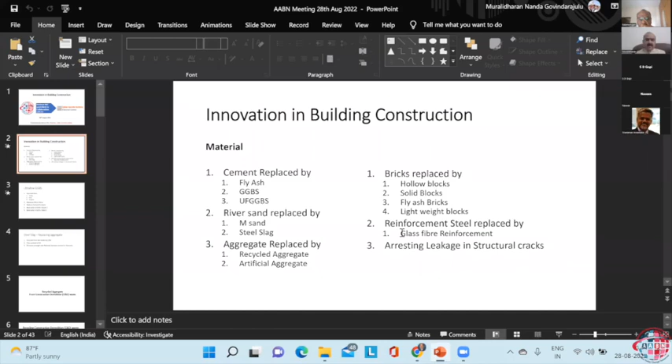So GGBS is ground granulated blast furnace slag. As per the codal provision, even more than 50% we can replace. It has all the chemical and physical properties of cement, and that can replace cement. We'll talk about that a little more in the coming slide.

Ultra fine GGBS is a further finer material of GGBS. GGBS is normally around 4,000 blaine, whereas ultra fine GGBS goes up to even 9,000, 10,000 blaine. That gets mixed with concrete for high grade concrete, where at times you're replacing with microsilica, you can use ultra fine GGBS instead.

River sand is getting replaced by M sand, and recently steel slag is also being used in the concrete industry, replacing fine aggregate. Interestingly, after the fine aggregate, coarse aggregate is also being replaced by recycled aggregate. I will talk a little more about that in the coming slide.

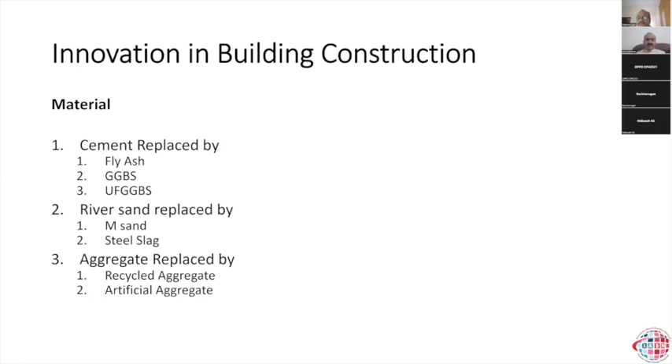About recycled aggregate, and the latest development, many people may or may not be aware of artificial aggregate. I am going to throw some light on that, which is very interesting and informative for the civil engineering industry. Of course, brick is replaced by hollow blocks and solid blocks, fly ash brick, and the latest is lightweight blocks. It has several properties through which the dead load of construction is minimized, cement consumption is minimized, and natural resources are saved.

You may think what is happening on the reinforcement steel side. The reinforcement steel is getting replaced by glass fiber reinforcement. Glass fiber reinforcement has got higher tensile strength than reinforcement steel, and it has a similar shape to reinforcement. You can even take rib steel less than 6 mm in this glass fiber. Other countries are already using it. Only the challenge with glass fiber reinforcement will be fire resistance.

There are many structures where fire resistance is not going to be a criteria, for example flooring, etc. So I'm also talking about some new products which can address structural cracks - cracks developed in the concrete. I'm going to share some products in detail which can be useful for engineers.

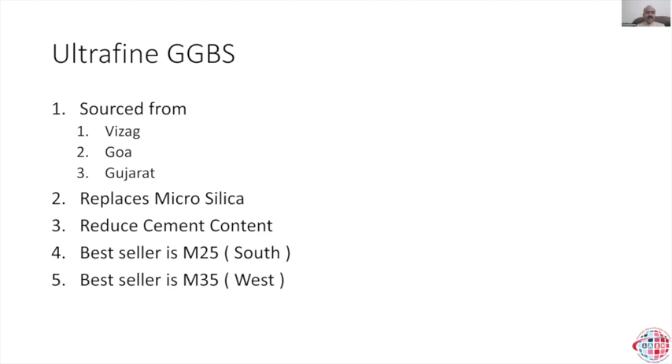So our ultimate theme today is what can be done on innovative construction. In South India, most concrete produced is M25 grade, while in the Western region like Mumbai, the best seller is M35 grade. What I'm highlighting is that designers can think of concrete wherein cement and cementitious material can be economically designed and used in construction, through which we can save the environment and get better floor space by going for higher grade concrete.

For your information, I have already executed the world's number one residential project in Mumbai, wherein we used M95 grade concrete, about 7-8 years back. What I'm trying to say is we need to make effective use of our cement and cementitious material, and the present batching plants are capable of manufacturing this kind of high grade concrete that can save the environment, save floor space, and save cement as an important material.

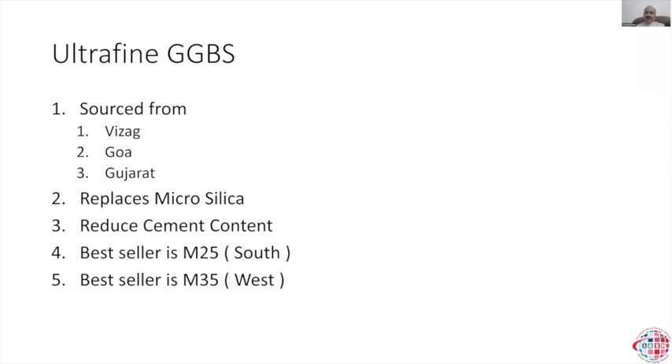Coming to steel slag. JSW is producing this steel slag and using it for replacement of aggregate, and it hardly has any clay content. By using that, there are studies and reports available showing it can enhance strength and reduce the cement content in the concrete.

Coming to recycled aggregate. When I say recycled aggregate, I'm talking about construction demolition waste, how it is processed and utilized back in construction. Please note that our codal provisions already permit the use of recycled aggregate in concrete.

Way back around 2015, IIT Madras took the initiative for a study on construction demolition waste generated in a city like Chennai. They conducted the study and submitted it to Greater Chennai Corporation and executed this project.

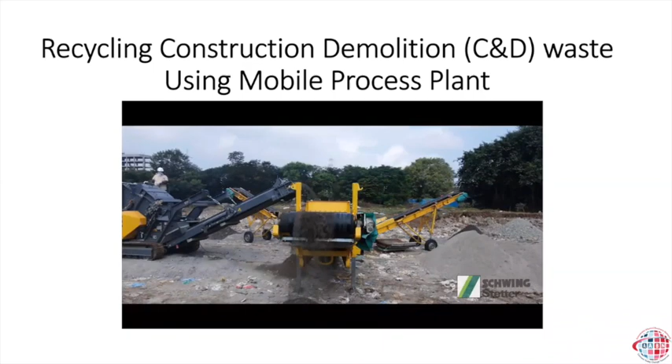So this kind of mobile process plant is suitable for major construction sites wherein you have an old structure to be demolished, which is very useful for reusing the material back into construction. If you noticed in that video, you might have seen the broken pile cap.

Am I audible? Audible, sir, please. Am I audible? Sir, audible, please. Okay, audible sir, so please, okay.

So this material, whatever is removed from the pile cap, you feed into this machine and adjust the screen such that if you wish to get 40mm material, or 20mm and 12mm material, you can produce it accordingly. Through this, good quality material can be recycled and used back in construction.

So you all agree these materials are expensive when procured from natural resources. This is a mobile process plant. Detailed study is already happening, and you may ask how this dry process sticks with the aggregates and how it behaves—that study is being done at IIT Madras.

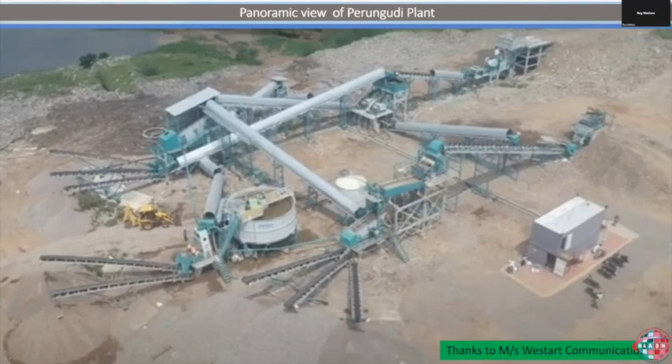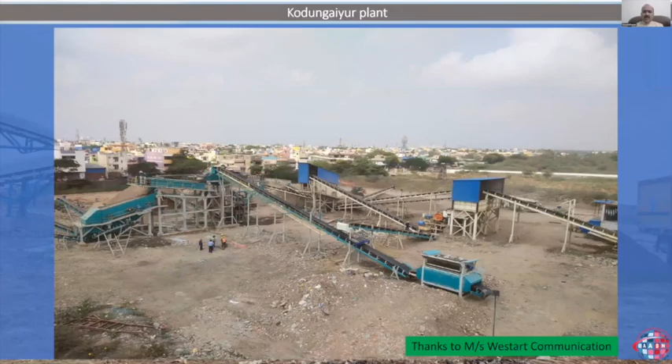The second plant is located in Kodungaiyur to handle the C&D waste generated in the North Chennai region. How is it being done? It has two sections: one is the dry section, another is the wet section.

For example, if they are getting waste mostly from concrete, they use the dry section, which has a primary crusher and secondary crusher. Thereafter it goes to the multi-deck screen where it is crushed and you get 20mm, 12mm finer aggregates. If you get oversized material during crushing, it passes through the VSI and gets processed back to the multi-deck screen. That's how this is produced.

On the other hand, it gets mixed with soil and other materials. What happens from the multi-deck screen? It goes to the thickener, where it is processed and water washed, removing the finer material, and you get the other fractions.

In this whole process, you can see a log washery. What the log washery does: during construction demolition from small houses or other buildings, you have unwanted materials like wood, small pieces of steel, tubes, bolts, nuts, plastics, bulbs, chokes, etc. All these things get removed, and they've got an online screen where they can also remove steel material.

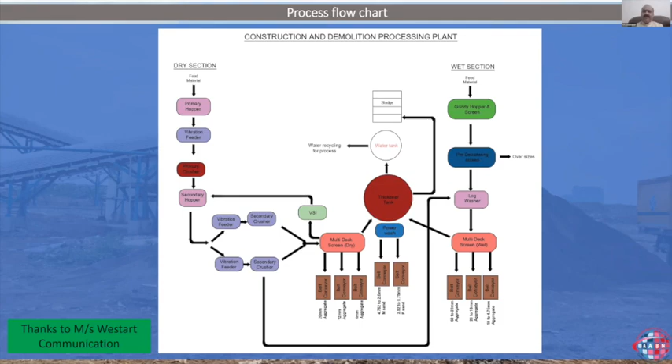It's a state-of-art technology with a 1,000 tons per day capacity, both plants put together. It's a versatile design, as I told you, with dry and wet sections. It has 2-stage crushing and also a VSI crusher.

Multi-stage washing takes place, and though fresh water is used, during the process it is also reused through a recycling process, with the water going back into the process itself. It has flexibility to make aggregates and sand of different sizes. It's a PLC-based operation, with close monitoring taking place on the process.

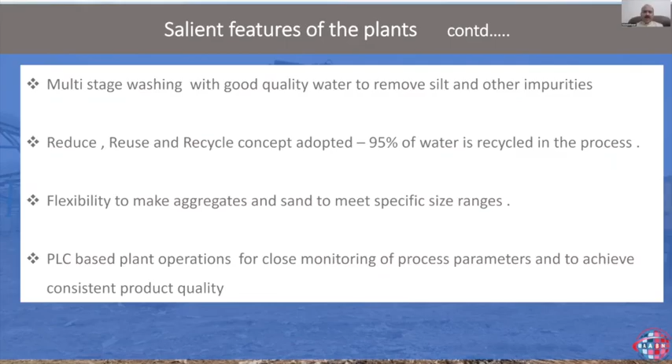If you see the products being produced from these plants: fine sand, coarse sand, aggregates - whatever the industry demands, in 6mm, 12mm and 20mm sizes. All the crushed bricks give you soil that is finer in nature, which can be used based on the need for filling back into construction.

Coming to the test parameters, if you see the parameters for fine aggregate and coarse aggregate - specific gravity, silt content, fineness modulus and water absorption - all are within permissible limits. Even the chloride content is under control, since it is completely processed through the water process plant.

This is all about recycled aggregate using the C&D process, both using a mobile plant and a stationary plant. There are countries where 95% of construction demolished waste is completely reused in construction. There are government rules that recycled material has to be used, and the government has taken initiative - Chennai Corporation has done this project on a pilot basis in Chennai. It is going to become popular across the country in a big way in coming years. Already the government has initiated this in smart cities and the rest of the district headquarters in Tamil Nadu.

Coming to artificial aggregate, you must be wondering what this artificial aggregate means. It is production of aggregate using fly ash, along with a bit of cement material with some admixtures, getting mixed together in a specific proportion with proper process control and mix design.

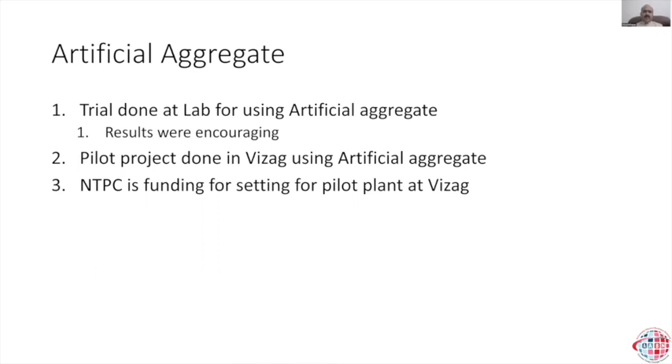Coming to glass fiber reinforcement - I've been talking about glass fiber reinforcement. These have a similar color to regular reinforcement. What you see in the picture is glass fiber reinforcement bars, and it comes in a kind of roll. You can get it easily in any length, you can fabricate it, and it can be easily tied.

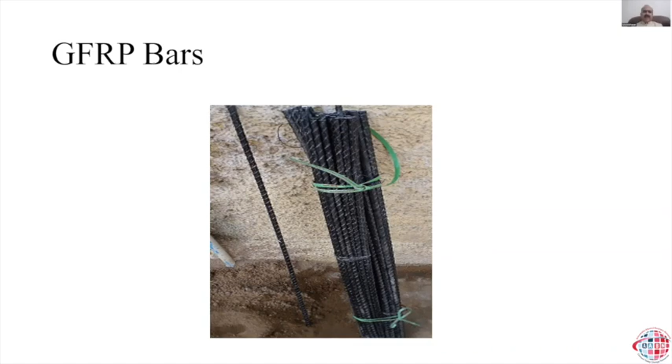The biggest advantage of this fiber reinforcement is that you will not find rusting, unlike in regular reinforcement, especially in coastal areas. I know corrosion is a big challenge for civil engineers handling such projects, and taking care of protection of steel through powder coating and other methods that we use. By using this kind of fiber reinforcement, this can be resolved.

Already the pilot project is in progress, and I will let you know once the production is ready. It is going to happen in coming years for Tamil Nadu also. Unlike the steel industry, it doesn't need a big amount of space. If you have about an acre of land, you can get this kind of raw material from Russia and get it processed, and you can get these reinforcements made to any size, starting from 4 millimeter to 25 millimeter. Only thing is you need to make the die for that.

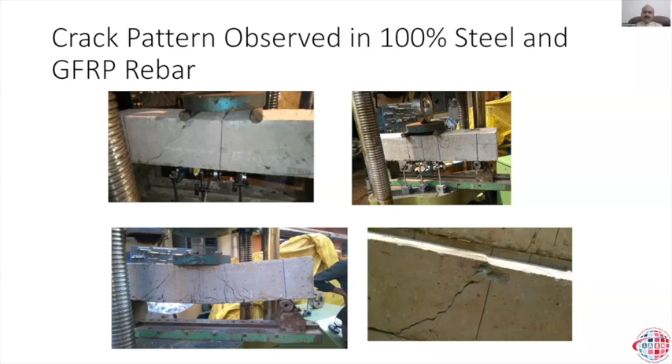If you see the performance of these reinforcements compared with steel reinforcement, you can see the picture of failure - steel reinforcement versus glass fiber reinforcement. You can see on your screen how the glass fiber reinforcement and steel reinforcement have behaved. We wanted to show you about this, and there are more studies in the country, but it is too early to come to India. Already initiatives are being taken to see that this material can be used in our construction in the country.

Coming to structural cracks, I know structural cracks in concrete are the biggest challenge for architects and consulting engineers. I know there are ready mix plants available across the country in a big way. I still remember, way before in 2000, we were hardly having a few ready mix plants in the country, and even Schwing Stetter was producing about 5 to 6 ready mix plants in a whole year - I'm talking way before in 2000. You know, nowadays they produce more than 5 to 6 plants in a day.

That is the kind of growth that happened in the ready mix industry. That is why the construction industry is also moving forward on a fast track basis.

If you are not handling concrete properly post construction, there are chances you may get cracks. At times there are problems with the design, and you may get structural cracks. How to deal with those structural cracks which may cause leakage and corrosion of reinforcement.

So for that, to seal these structural cracks, we need an environment friendly material in a single pack system. When I say single pack system, it means not mixing a couple of materials to produce this kind of waterproofing material, and to have a long-term warranty, also to save historical buildings where over a period of time structural cracks have happened.

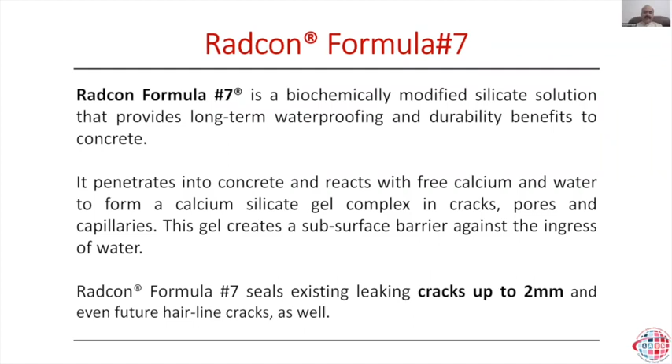I'm going to play a small video on how the product works. Let me go through the video first, then I will talk about it.

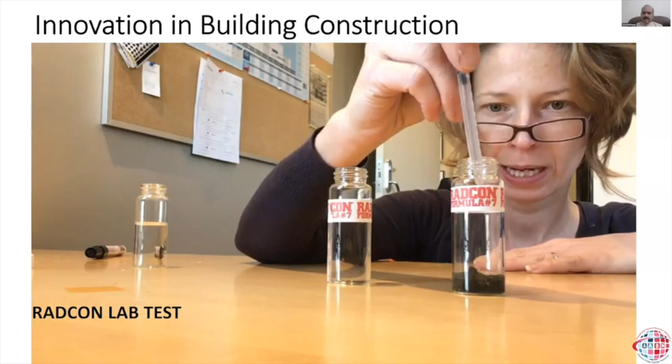Hi Angie, so it should be really easy. You just take the one small bottle with the crushed concrete in it. It's got also 3% solution of calcium acetate, we've measured it correctly. The other one with no rocks, that's got Radcon in it. So just take the little syringe, get a full 1 milliliter of Radcon in, and then just slowly apply. You see, you can see the gel forming nicely. There you go, and there is your instant gel forming Radcon reaction. Alright, good luck.

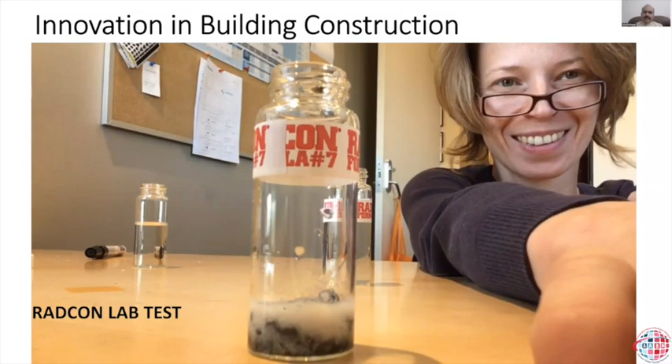So what she did: she took a broken piece of concrete, put it in this jar for quickly understanding the process. She added a chemical to see that this Radcon is reacting with the residual calcium, forming calcium silicate gel. So this is what she has demonstrated, through which the pores are getting filled through the gel formation. Now I'm going to show the next video on how the application takes place.

This chemical addition is required only for older construction, for example 5-year or 10-year-old construction. If it is fresh concrete, 28 days old, already cured and attained its strength, you don't need this kind of thing—directly you can apply Radcon.

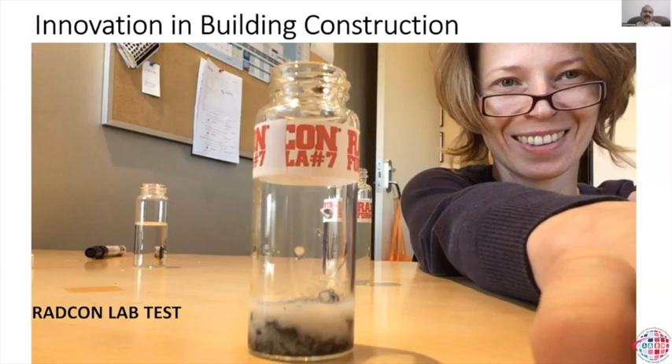I'm going to show you the following slide where it talks about the application part.

Preparation of the surface is very important before this application. So what you see is it is applied on the concrete surface and is easy to apply. Even 50,000 square feet can be applied in a single day.

You don't need a huge amount of manpower—easy to apply. Another important thing is you can allow traffic to move over this, there is no problem, and it reacts to become monolithic. That is why even after allowing traffic, it will not peel off.

You may ask about the bond. There is a good bond strength between this and the material. Once it is dried up, you cannot make out that even this product has been applied.

Another important thing: when you have water storage construction, drinking water tanks, if you are using chemicals, that is harmful for health. But this product is environment friendly and it is food grade. There is no problem with the material and it heals the concrete.

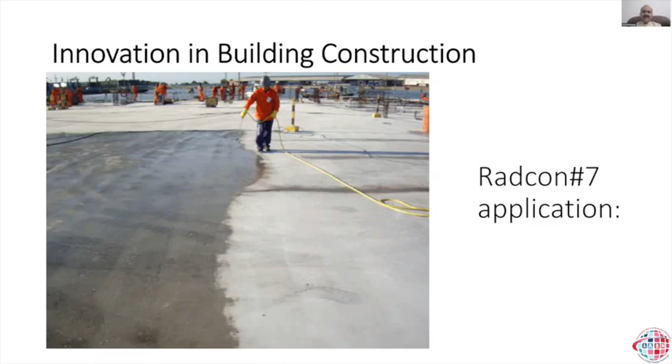There are enough material course and technical details available. You can go through the website of the company called Radcrete. You can go through that. More details you can reach out offline. I can also support on this for your need.

Next one is industrial floor. I know industrial floor design is a big challenge these days. Unlike a regular RCC slab for roof construction, where you have proper design and support, designing an industrial floor with minimum joint or no joint, what should be taken care of when the subgrade is challenging, what kind of reinforcement to be used, what kind of fiber reinforcement can be used, and how we can handle industrial flooring construction in the future.

Because nowadays industrial floor operations happen mostly manually, but in developed countries this industrial flooring is happening through robotized machines. Even the forklifts are all programmed, artificial learning and all those things happening. People program it. Even to the tenth floor, somebody has to pick the material in the storage bin. The robotized machine travels on the floors, picks the material and comes down.

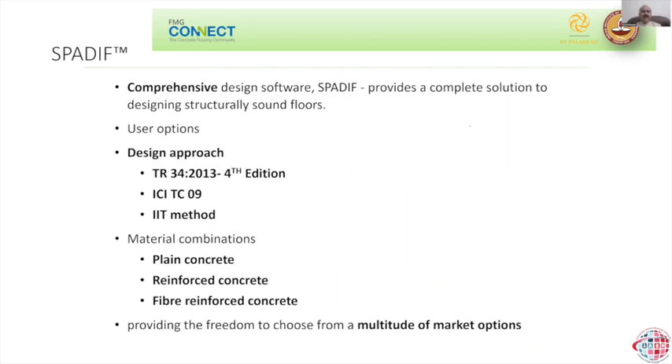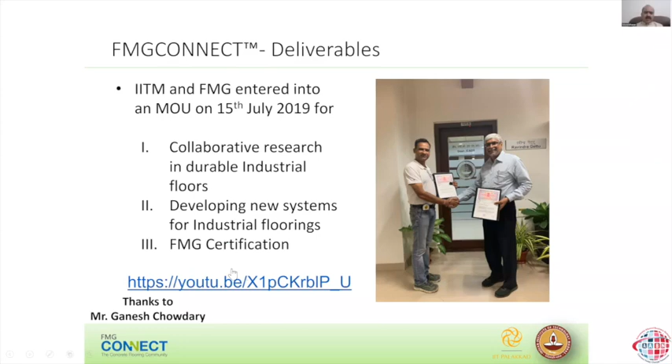To overcome all that, this kind of design approach and having the design record as a part of the project report will be very useful for our next generation in effectively using such floors based on utility in the coming years. So this kind of software will be very useful. As I mentioned last month, it has been launched, and I'll just quickly go through the YouTube video which talks about the features of this particular thing.

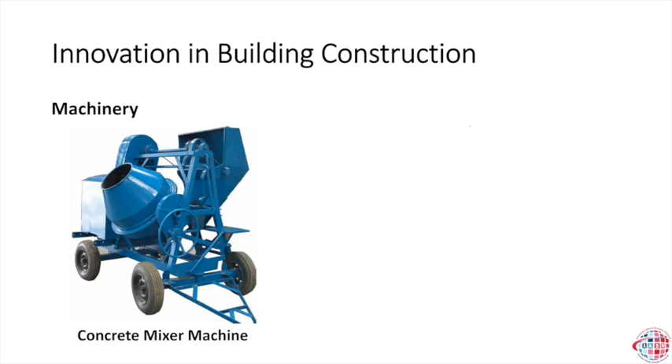But the big transformation that happened from this concrete mixer machine is the batching plant. Because of this innovation and the development happening in the country, across the country we could see metro projects, radial roads, infrastructure and other projects, even building construction and bridges, all happening on a fast track basis.

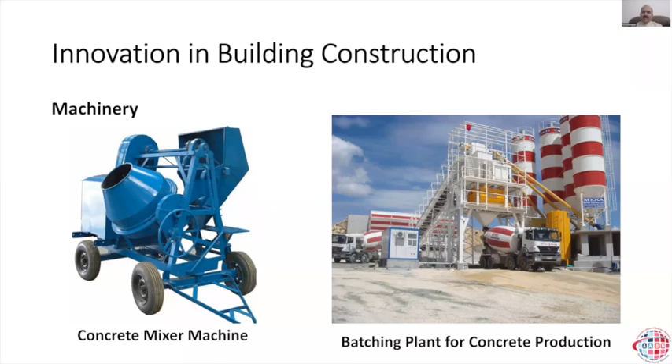And this is going to continue for sure. If you look at what innovation is happening in concrete production in recent years, it's the self-loading mixer. What is unique in the self-loading mixer? This self-loading mixer does the production, mixing, transportation, and delivering of concrete. The job of a batching plant is mostly getting replaced by this small mobile equipment. Thanks to Schwing Stetter, who have done a lot of innovation on this and introduced this machine to the country, and it is popular, with still scope to enhance its utility in construction in a big way.

Why do I say that? What is the specialty of this self-loading mixer? This multi-function equipment completes the loading, mixing, transportation, and unloading, all in one, and it rotates 255 degrees.

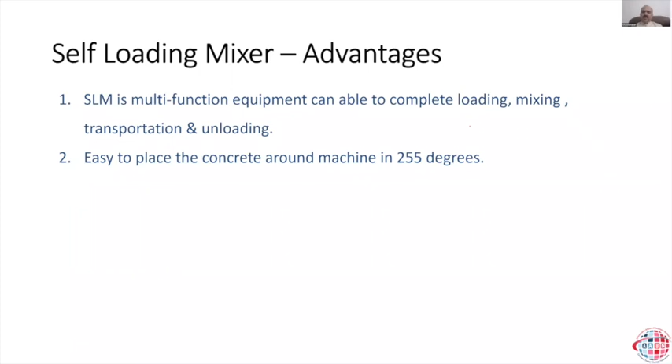This new technology machine can pick material from the site, aggregates and other stuff easily, and mix the required thing in a mobile equipment at the job site itself. And you need not worry about mobility. It has a 4-wheel drive feature, and it can even move over uneven surfaces, even tough sites which are not in motorable condition.

Interestingly, it needs very less manpower because most of the activities are mechanized. It has very less maintenance.

You know, the initial cost of setting up a batching plant, you need at least 3,000 square meters of land. And along with that, you need a factory permit, pollution clearance, a bunch of laborers, technical people for operating the plant. In a project where your activities are going to complete in a few months, shifting a batching plant is a problem, wherein the foundation and other infrastructure created has to be either written off, or you need some mobile foundations where we can use it.

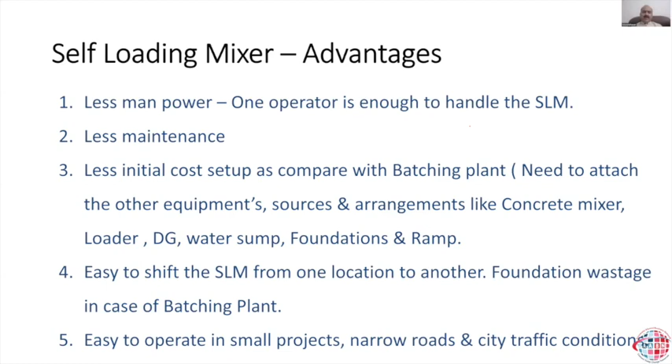But in case of self-loading mixers, all these things are beneficial. It is easy to operate even on a narrow road, and in city traffic conditions—you're all aware that in many projects, during peak hours and limited traffic hours, you may not get ready mix concrete. If you have such facilities at your project site itself, it is easy to manage. So let us quickly run through the video to see the benefit of this equipment.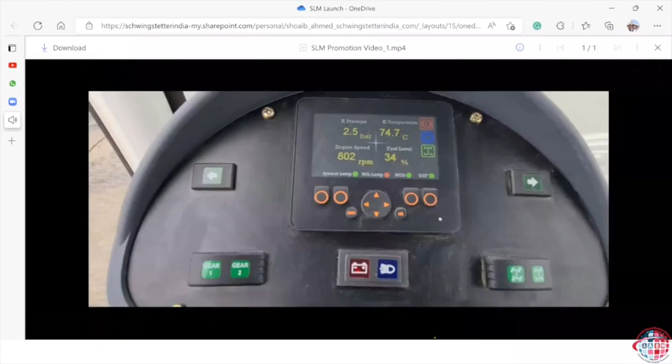So it has several features to ensure the mix is controlled. You get the batch slip, time of batching, water mixing, all that you will have. There are a lot of features in this.

Next important thing on the building construction side is 3D printing. This is going to happen, and it's progressing on a fast track basis, and already a small house has been constructed—an L&T 2-story building. This technology is also becoming popular, with a price guide of 2.5 to 2.7 million for this 3-bedroom home, eventually.

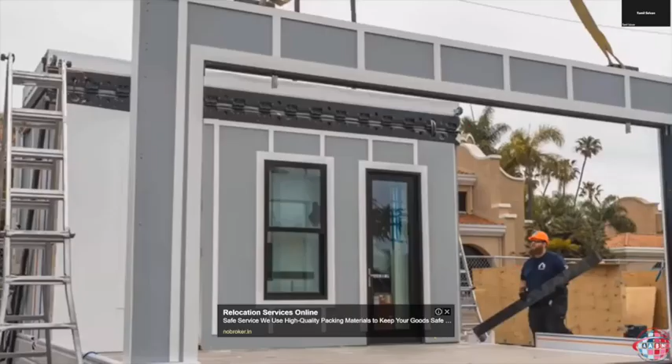With the price of houses skyrocketing out of control and putting a new home out of reach of most people—one such house sold at auction for $2,740,000—companies have been trying to come up with cheaper solutions in the hope of overcoming the affordable housing crisis, such as small kit homes and shipping container homes. But one company by the name of SQ4D has designed an industrial-sized 3D printer to print a full-size house on location. This is all out of 3D concrete construction.

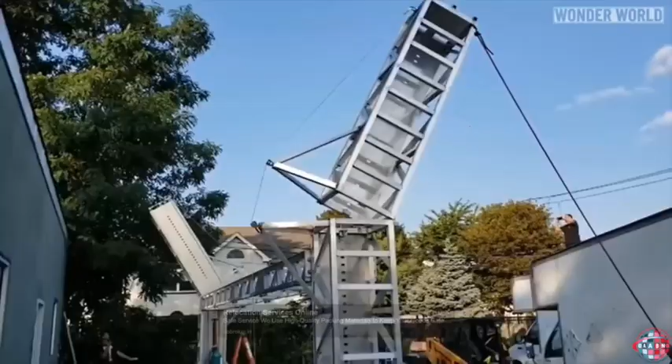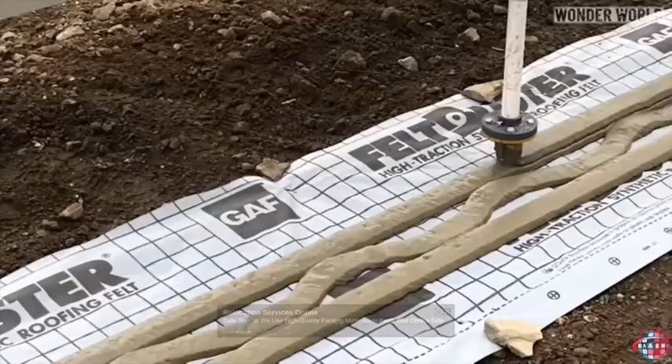The company can set up the 3D house printer at a build site in 6 to 8 hours, and can print a 1900 square foot home in under 48 hours. The printer lays concrete layer by layer, creating the foundation and the interior and exterior walls of the house.

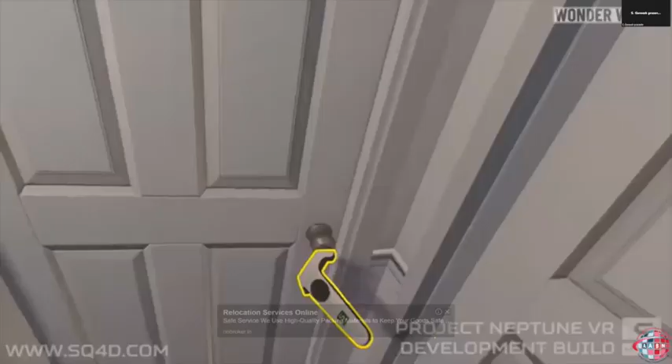The 3D printed house comes with 3 bedrooms, 2 full bathrooms, and an open floor plan. And because it's printed from concrete, its strength and durability exceeds that of conventional wood frame house construction. Plus, the concrete used to print with is 2 to 3 times stronger than most brick and block homes. And the houses can be printed anywhere, on any block of land, even with elevations.

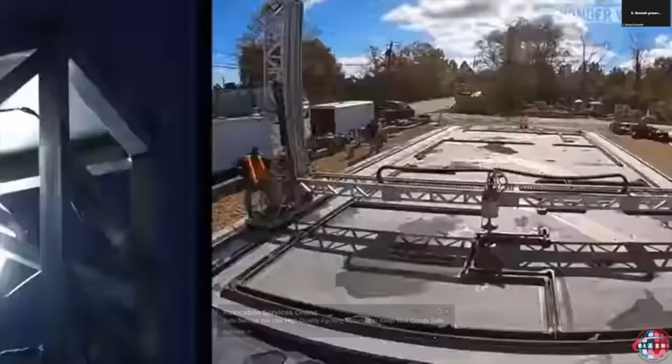There are many benefits to automating the construction of homes, including build speed and time on the job site. There is also the added benefit of knowing exactly how much material is needed and extruding only that amount, radically reducing construction waste and lowering overall cost. So to give you an idea of savings, the 3D printed house is built at half the cost of conventional homes. And because it uses concrete and an autonomous 3D printing robot, this will help with issues such as lumber and labour shortages, like we are experiencing during the pandemic.

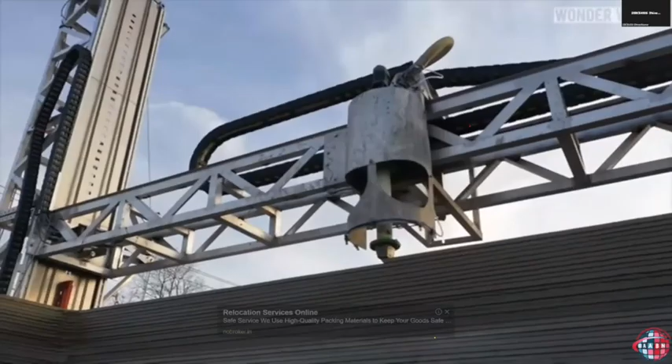When the house is finished, it has a ribbed look to it, just like most 3D printed objects. These ribs are the layers of concrete stacked on top of each other. You can choose to leave the ribbed look on the inside of your home and simply paint over it, or you can have traditional plaster walls installed over the top of the concrete. On the outside, you can leave it ribbed for a unique look, or cover it with paint, render or cladding.

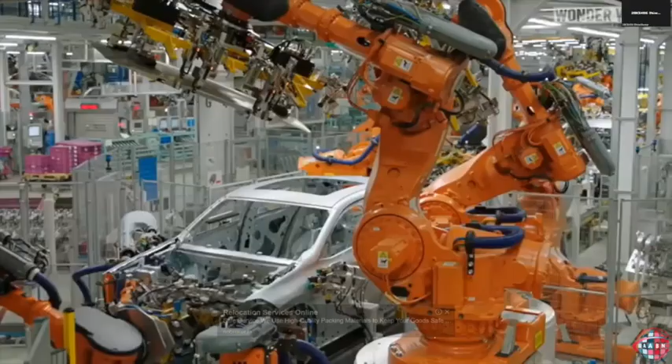Robotics and automation have changed so many facets of life, just like robots in manufacturing that build the cars we drive or devices we use. A robot printing your home is just the next step in robotics automation. They may not lower the cost of land, but they will make the house quicker, stronger and cheaper to build.

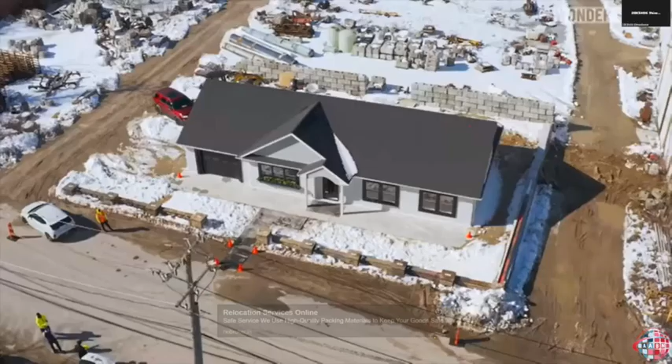In India, in Chennai, IIT Madras already constructed a single-story building. L&T has constructed a 2-story building at their campus in Kanchipuram. The 2-story building construction was completed in 4 days, for your information.

How to achieve low carbon and lean construction through the materials we have discussed: very recently, the alternate cementitious materials like fly ash, GGBS, ultrafine GGBS and combination of all, using recycled aggregate through C&D waste, artificial aggregate, going for fiber reinforcement, using lightweight blocks instead of clay bricks, and on the design side, precast construction. So precast construction is becoming more and more popular.

To be honest with you, in Tamil Nadu we are on the slow pace. If you look at Andhra Pradesh and other states, it is fast track.

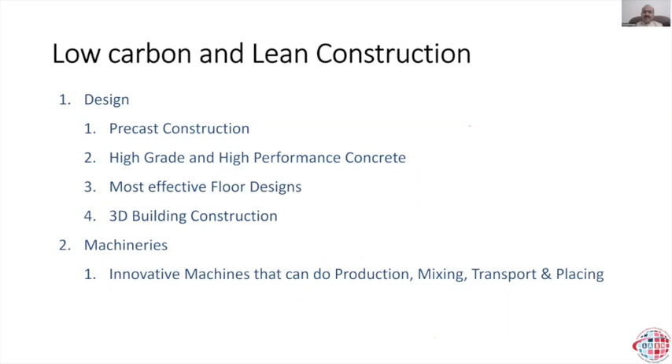I know we were talking about construction of houses in days, hours, etc. Now here is construction happening in 10 minutes.

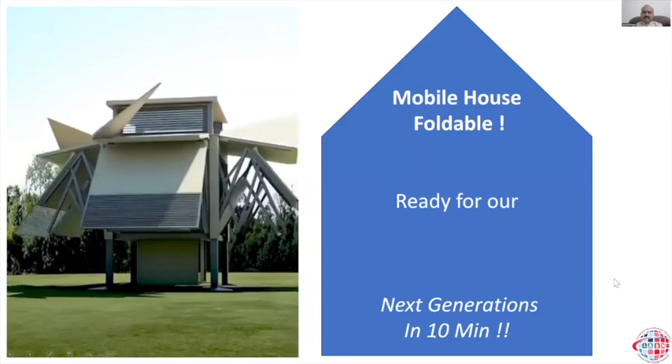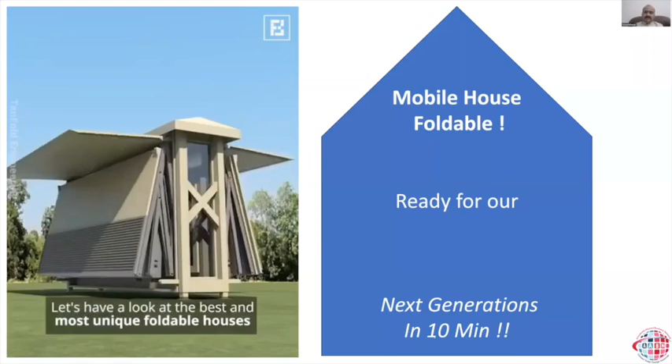Foldable houses are the pinnacle of architecture. You can assemble and disassemble these homes anywhere. Let's have a look at the best and most unique foldable houses.

TenFold structures. TenFold, a UK-based company, has developed a modular, self-deploying structure. It can transform from a truck-sized block to a fully functioning building, and the process takes less than 10 minutes.

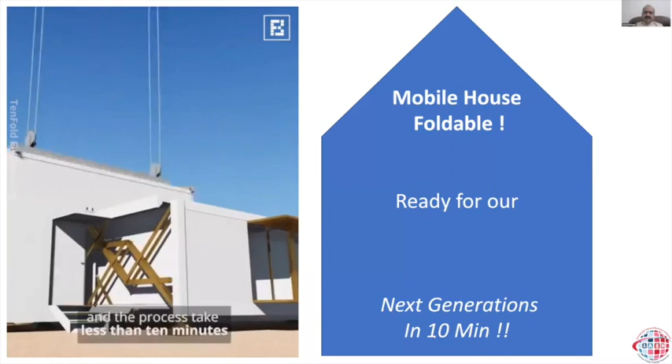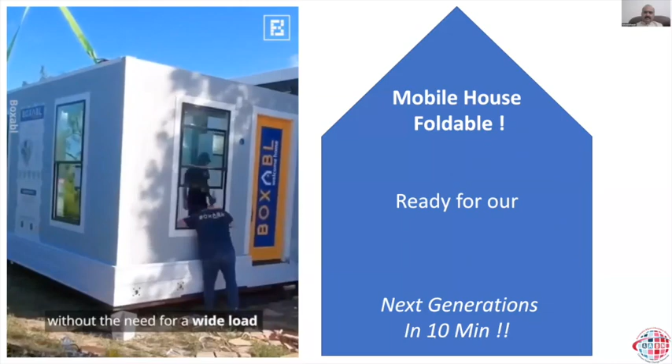Boxabl Casita. Boxabl's foldable houses can be shipped without the need for a wide load. The company's first product is the 20 by 20 foot Casita, which starts at $49,500.

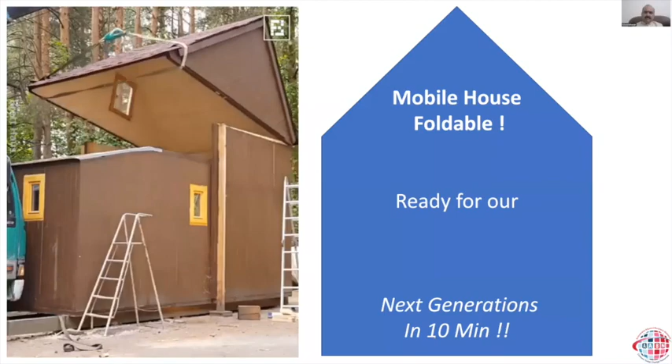Brette Haus: innovative movable homes. Latvian housing startup Brette Haus offers foldable cabins that can be moved anytime. A hinge on the floor allows one side of the home to fold into the other, while another hinge along the top permits the entire roof to fold down.

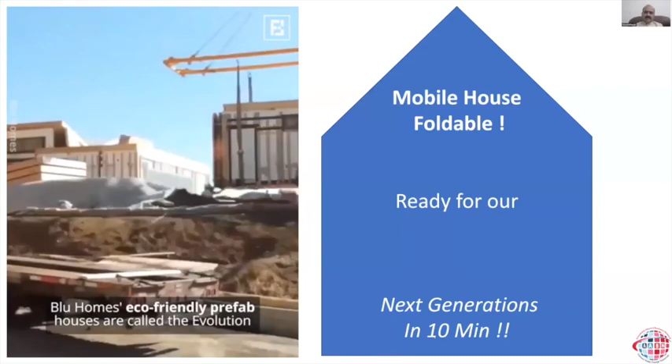Blu Homes. Blu Homes' eco-friendly prefab houses are called the Evolution. The prefab homes by Blu Homes use half the energy that a typical home uses.

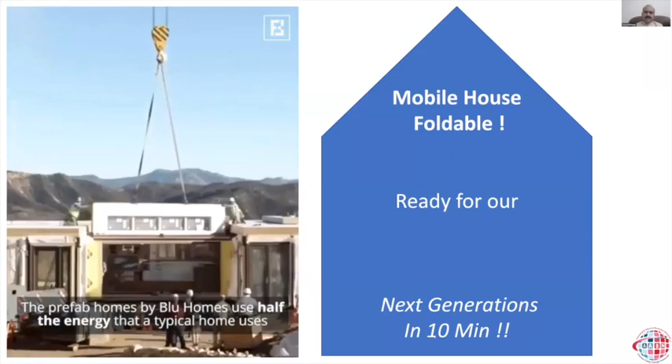Casper Scholl's Garden House. This garden shed has moving walls. Timber and glass walls slide along runners in the movable house.